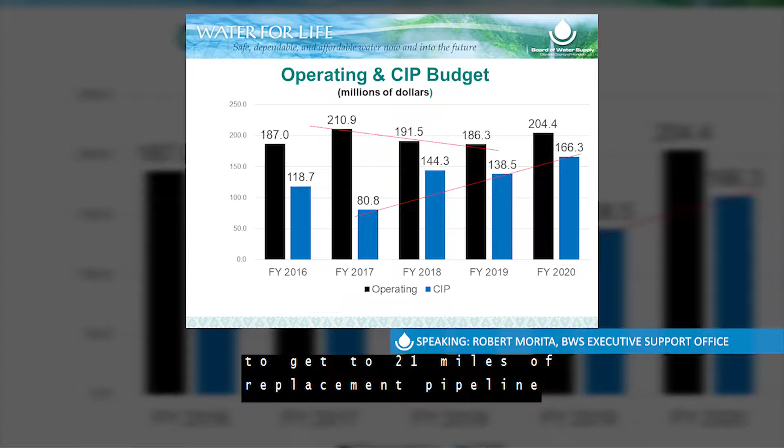The decreases, as mentioned, were shifted to the CIP budget in the past, and so this is the result — you can see the CIP budget has now had a marked increase in funding. This is consistent with our Water Master Plan, Long-Range Financial Plan, and our effort to get to 21 miles of replacement pipeline within 10 years.

For highlights of the operating budget, in terms of salaries, we are not asking for any increase in full-time equivalent counts — the count remains at 741 FTE. In terms of dollars, there's a slight increase of about $247,000 in salaries. That effectively reflects the effects of collective bargaining, the full-year effect of some of the latest collective bargaining increases reflected in fiscal year 2020 over FY19.

This was brought up at the budget workshop, asking about initiatives on the human resources and personnel side. As far as initiatives go, we've looked at optimizing available staffing — basically using whatever vacant positions we don't feel are the most critical, and in turn using them in place of more critical positions needed going forward. We're trying to live within our means, within the current employee headcount we've been given through the budget, rather than just coming forward asking for more and more positions each year. We try to look within first.

Expanding operational capacity through leveraging technology. In the FY20 budget, there's also development of an HR strategic plan being planned for, and participation in the Society for Human Resource Management, or SHRM, conferences to explore new strategies for recruitment and succession planning.

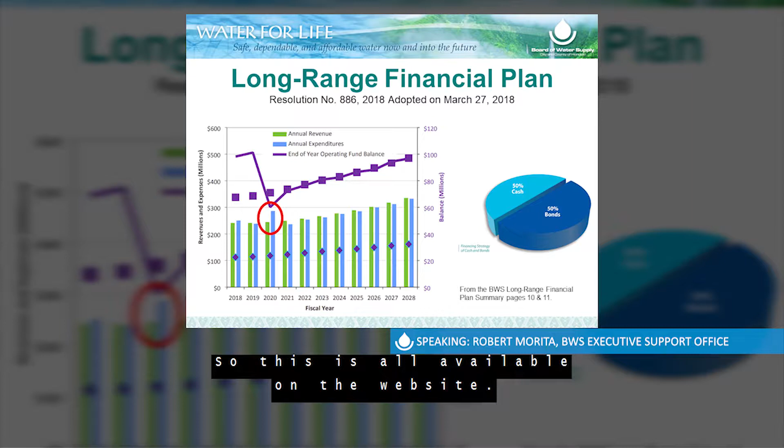So this is all available on the website. I took these two particular graphics from the long-range financial plan summary that's on the Board of Water Supply website.

And so now we're going to move into the capital improvement program budget, but I know I went through that kind of quick. I don't know if there's any questions from the board members that we can answer at this time.

Okay, if not, we will switch things up a little bit. Usually I call up Jason Takaki to go over the capital budget, but this time we wanted to ask Barry Usagawa to come up and cover some of the conditions and assumptions going forward for the Board of Water Supply in terms of its long-range planning and how that ties into the current capital improvement program budget we're presenting. As you know, Barry Usagawa is the head of our Water Resources Division. Barry?

Thank you, Robert. The FY2020 CIP does support the BWS vision and mission of Water for Life: safe, dependable, and affordable water now into the future. It is aligned with the strategic plan and the division's goals and objectives and the 6-year capital improvement program. So what does that mean?

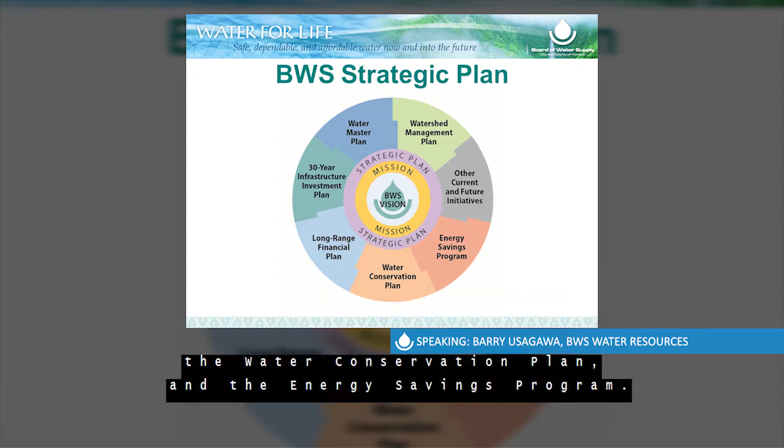Also tied in is the Long-Range Financial Plan, the Regional Watershed Management Plans, the Water Conservation Plan, and the Energy Savings Program. In the future, other initiatives will also drive the results you see in the annual CIP budget. The Water Master Plan evaluated the entire water system for condition assessment based on risk, and we define risk as the consequence of failure times the likelihood of failure.

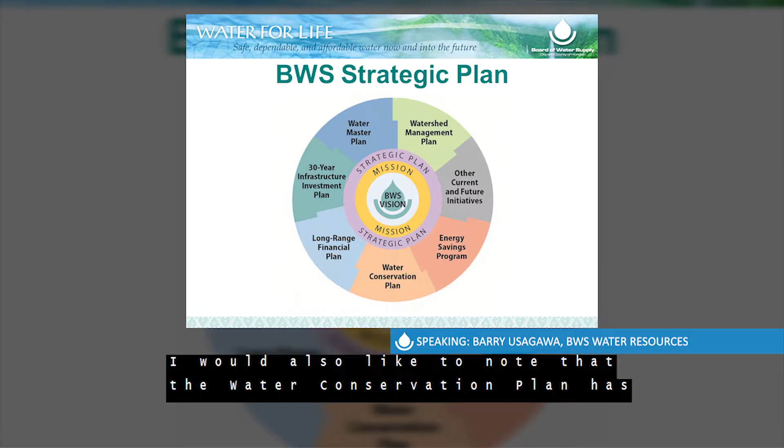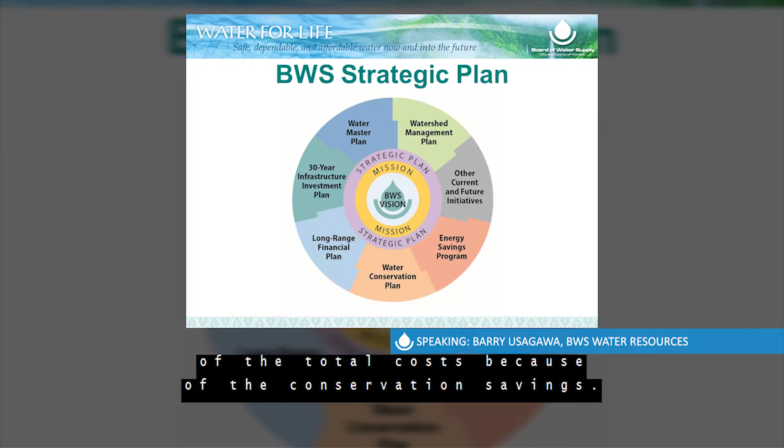The annual CIP reflects the highest priority projects identified in the Water Master Plan effort. I'd also like to note that the Water Conservation Plan has driven a 30-year reduction in water use, thereby freeing up existing water system capacity that addresses growth and resiliency. The capacity expansion projects you find in this year's CIP are only approximately 15% of total costs because of conservation savings. So what about climate change?

The Water Research Foundation - we partnered with the Water Research Foundation in 2015 to conduct a vulnerability assessment. The Water Research Foundation is one of the top research organizations for everything water in the nation. And so in 2015, we co-funded this vulnerability assessment study through their tailored collaboration program.

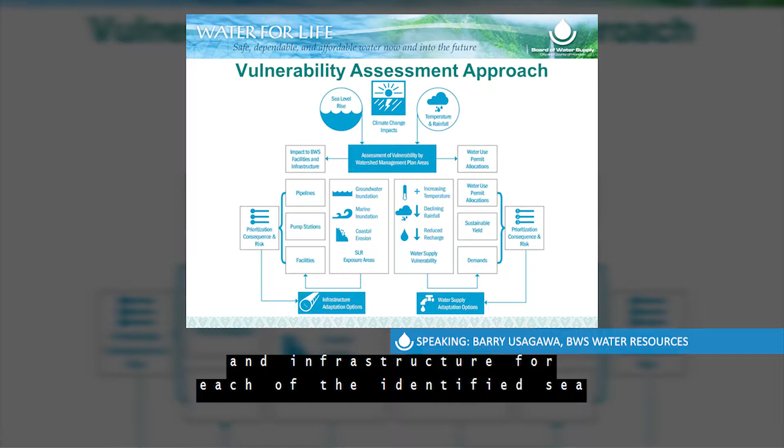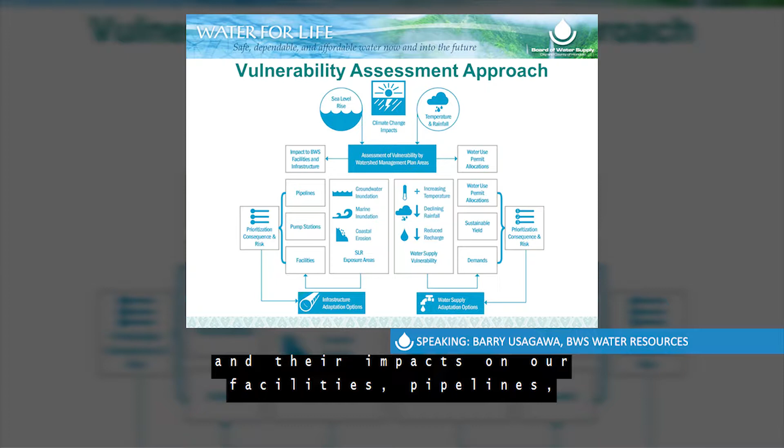The vulnerability assessment approach is based upon climate change projections and sea level rise, specifically potential impacts to BWS facilities and infrastructure for each of the identified sea level rise hazards, which is coastal erosion, marine inundation, and groundwater inundation, and their impact on our facilities, pipelines, pump stations, and other facilities from an affected sea level rise of 3 feet by 2100.

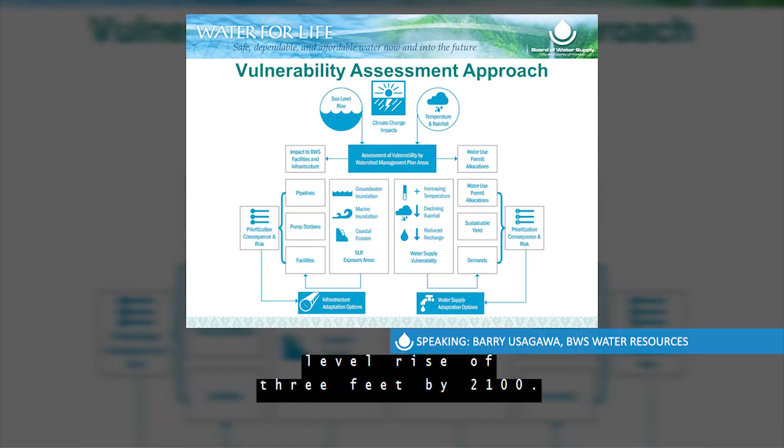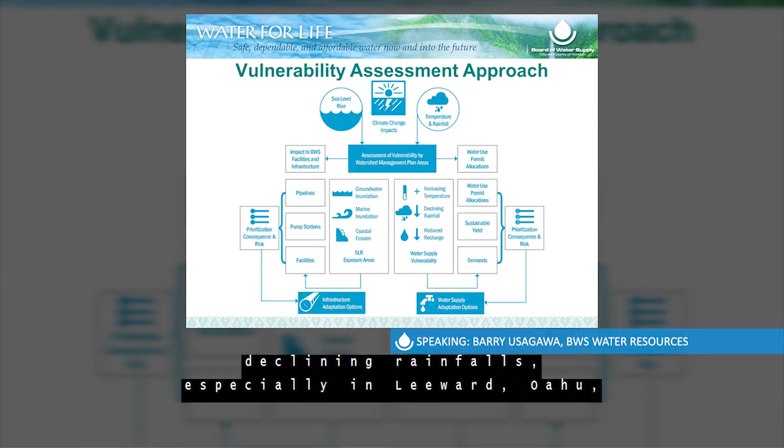For temperature and rainfall, we looked at impacts to the water resources and the effects on our water sources. We expect increased temperatures, declining rainfalls, especially in leeward Oahu, and the reduction in recharge that will impact the aquifer sustainable yields, water use permit allocations, and water demands.

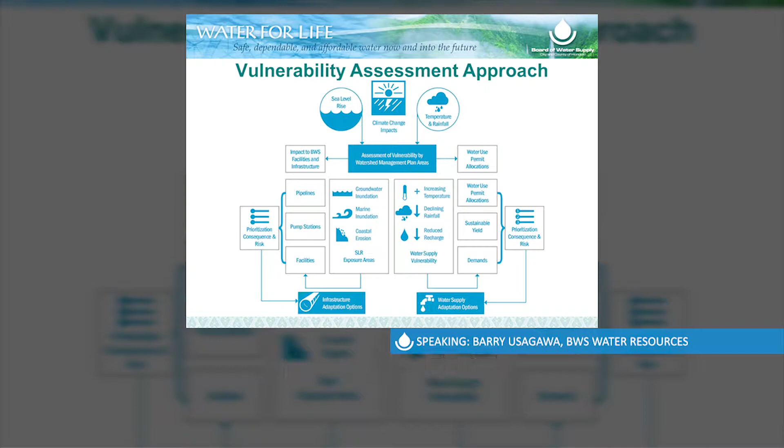In addition, the BWS has joined the Water Utility Climate Alliance Network, which is comprised of 12 of the nation's largest water providers that collectively supply drinking water to more than 50 million people in the United States. WUCA, as they call themselves, is dedicated to providing leadership and collaboration on climate adaptation issues to ensure that water utilities are well positioned to respond to climate change within the context of water management decision making.

So our intent is to, in effect, monitor the pulse of the nation's progress toward climate change adaptation and to fold that into our long-range planning.

With that, I will turn it over to Jason, who will walk you through the CIP. Thank you. Jason Takaki, head of our Capital Projects Division. Chair Andaya and board members.

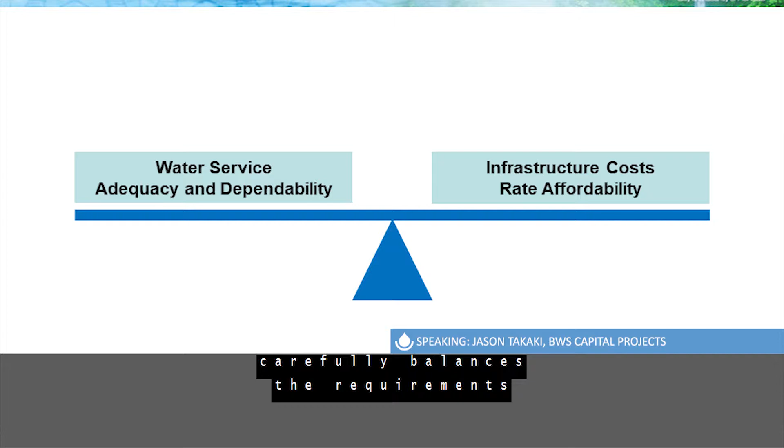This year's $166.3 million capital improvement program carefully balances the requirements of ensuring safe and dependable water delivery with cost-effective resource allocation.

Renewal and replacement addresses the needs of the existing water infrastructure. $115.9 million is proposed in this category. And finally, the 3rd category is capacity expansion, and $21.8 million is proposed for these projects.

$23.7 million will be provided from the Special Expendable Fund. And finally, $65.3 million will be provided from proceeds of a planned bond issuance that Mr. Morita referred to earlier.

We thought this would be a good time to tie some of the HR information that Mr. Morita provided earlier to the CIP. Throughout the development of the Water Master Plan, we have simultaneously been working to address the challenges of implementation. Following a detailed needs assessment, we optimized and documented work processes and implemented a number of initiatives to ensure operational efficiency.

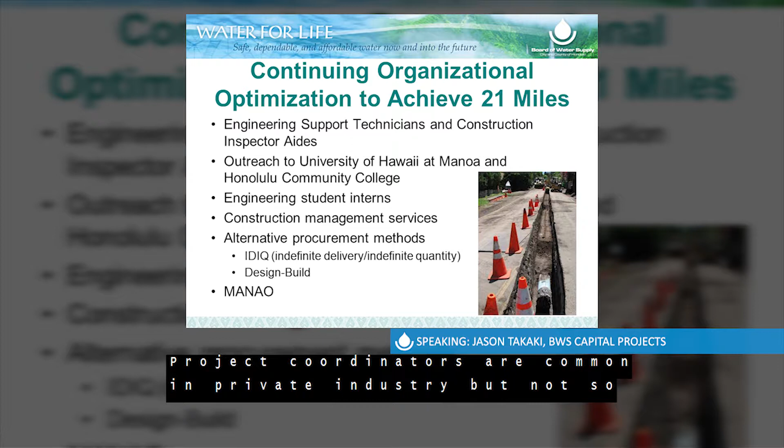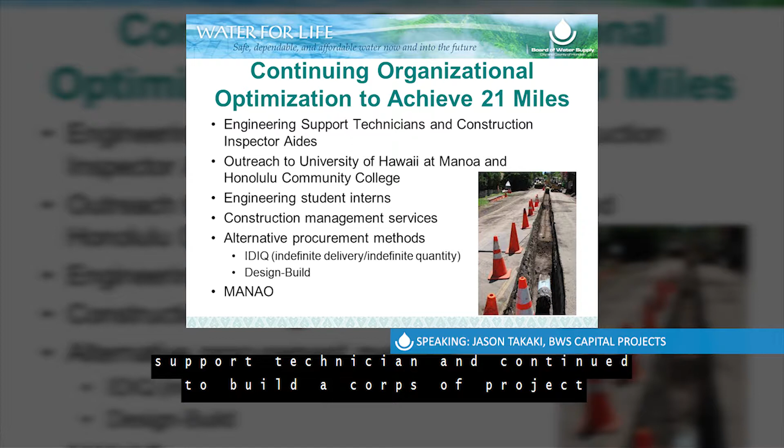Key personnel categories we need for the CIP, engineers and construction inspectors, are designated as shortage categories in civil service. To extend the capacity of our staff, we introduced project coordinators, paraprofessionals to improve the efficiencies of our engineering and construction inspection staff. Project coordinators are common in private industry, but not so in government. We modified the position description of an engineering support technician and continue to build a corps of project coordinators.

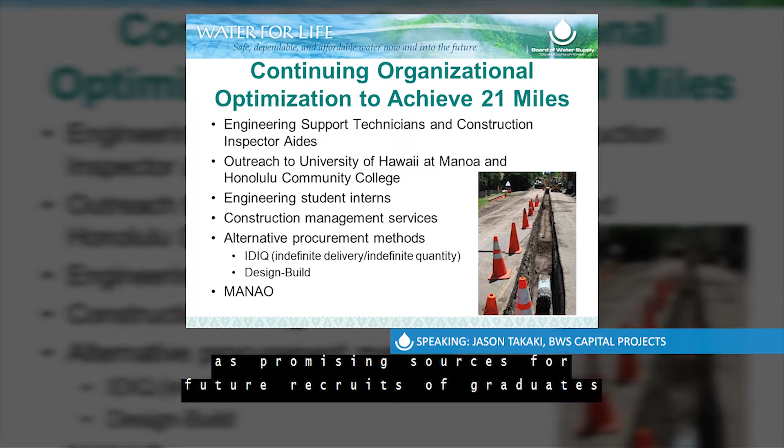We extended our reach for construction inspectors by lowering the entry level, and we've successfully recruited construction inspector aides. We established key contacts with the University of Hawaii and Honolulu Community College as promising sources for future recruits of graduates and student interns.

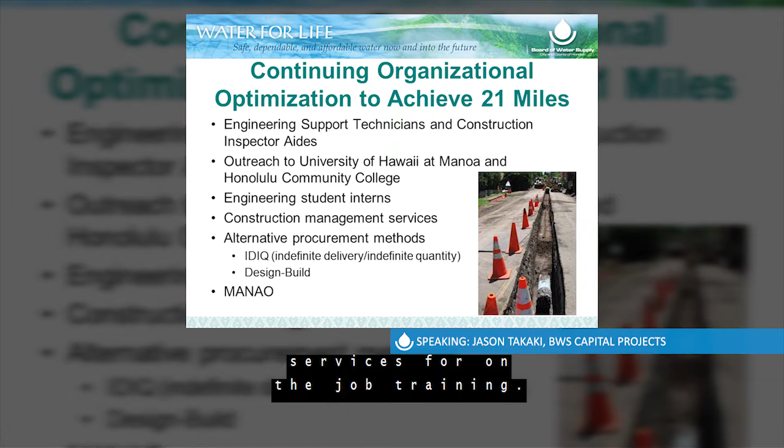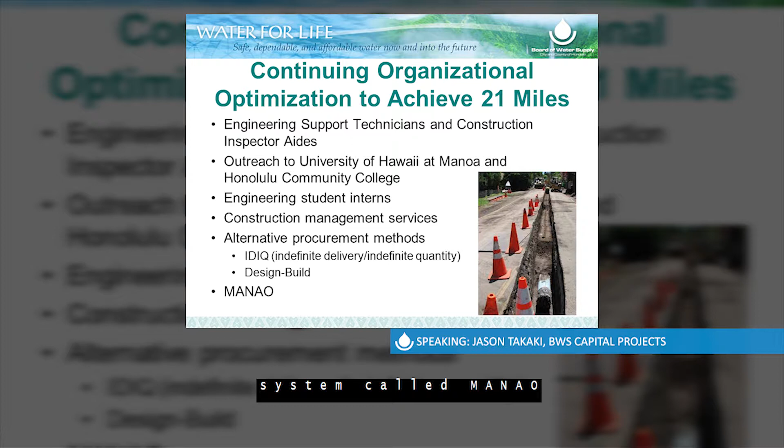We continue to increase staff capabilities using on-demand procurement and contract management training, and enlisting professional construction management services for on-the-job training. We continue to explore procurement alternatives and implemented a comprehensive project management information system called Manao. The Manao system will track project execution and improve predictability of project delivery.

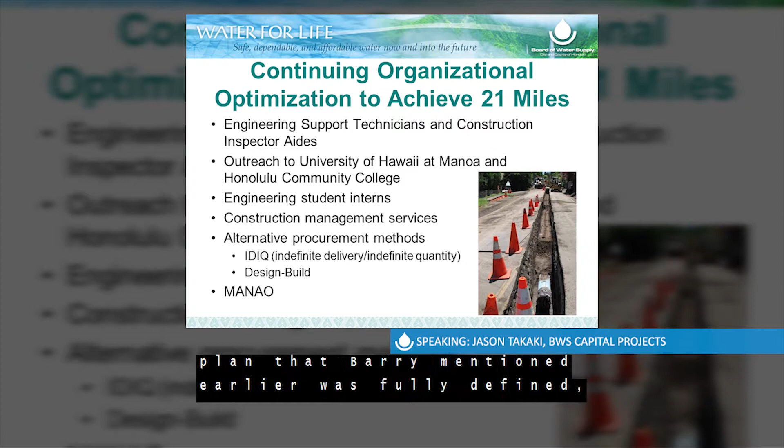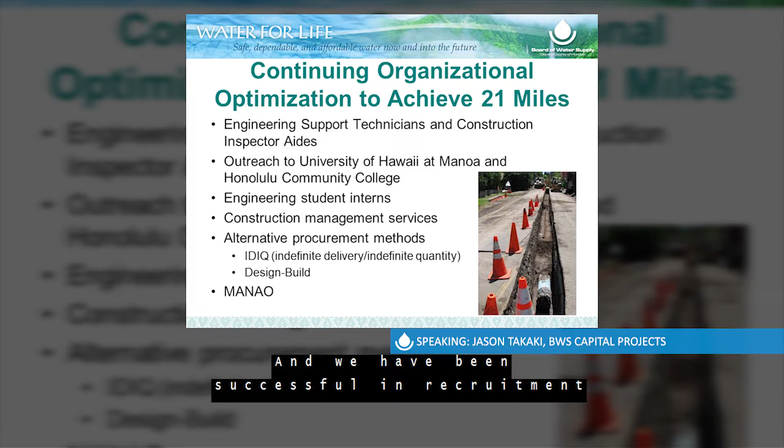Once the project mix in the infrastructure investment plan that Barry mentioned earlier was fully defined, a thoughtful, gradual schedule of staffing requirements could be formulated. We have been successful in recruitment and continue on target with our staffing schedule.

In Category 1, Research and Development, we will continue using construction management services for selected projects to increase our capabilities and capitalize on training opportunities to increase in-house construction management competencies. Additional groundwater monitoring wells are planned...

In Category 2, renewal and replacement, we address the needs of the existing infrastructure. We will replace pumping units at Mililani Wells 2 and Hoaeae Wells. We will renovate the Waipahu Wells 1 facility and continue with more pump renewal and replacement projects to address the needs of the system identified by our engineers and the Water System Operations Division.

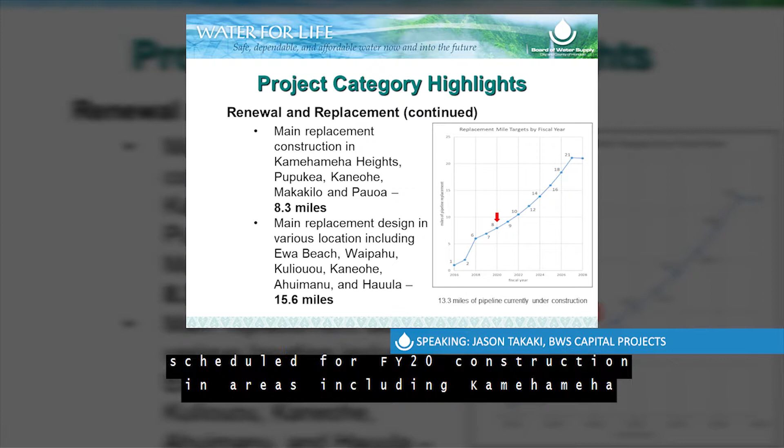Category 2, renewal and replacement, is also pipeline, and includes the needs of an aging water main infrastructure. Our largest asset is the underground transmission and distribution system, and just over $53 million are allocated for pipelines. 8.3 miles of main replacement are scheduled for FY20 construction in areas including Kamehameha Heights and Makakilo, in line with our target of 21 miles of main replacement per year by FY27.

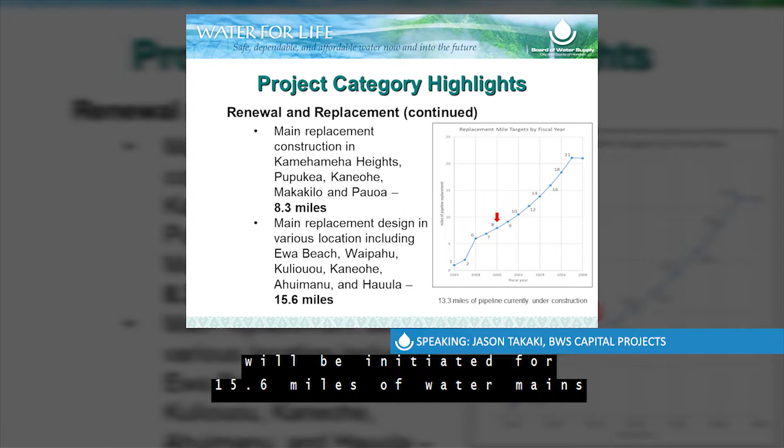In support of an expanding pipeline construction program, new pipeline replacement design projects will be initiated for 15.6 miles of water mains to address aging infrastructure in areas ranging from Ewa Beach to Kaneohe to Hauula. For your information, there are currently 13.3 miles of pipeline construction currently underway island-wide.

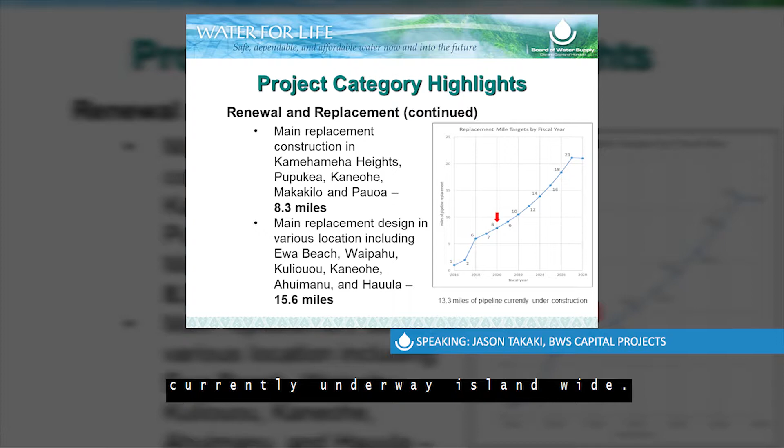We have learned that the plastic material previously used becomes brittle with age and cracks, resulting in service leaks. This year, 338 laterals will be replaced in the Waipio and Waikele areas. We will also continue with improvements to our granular activated carbon water treatment facilities to extend their service lives.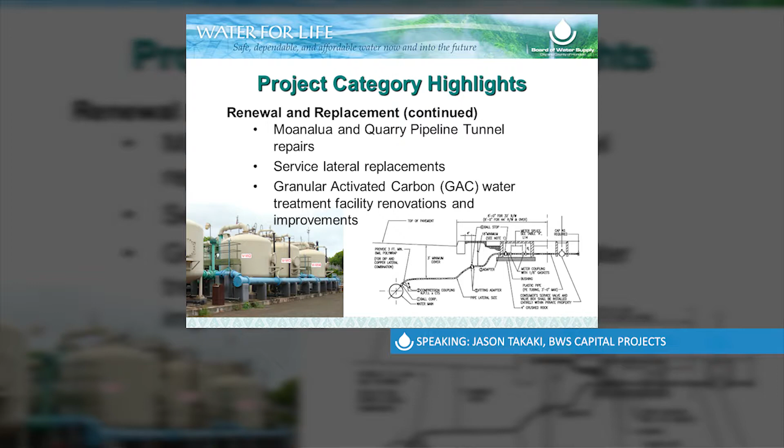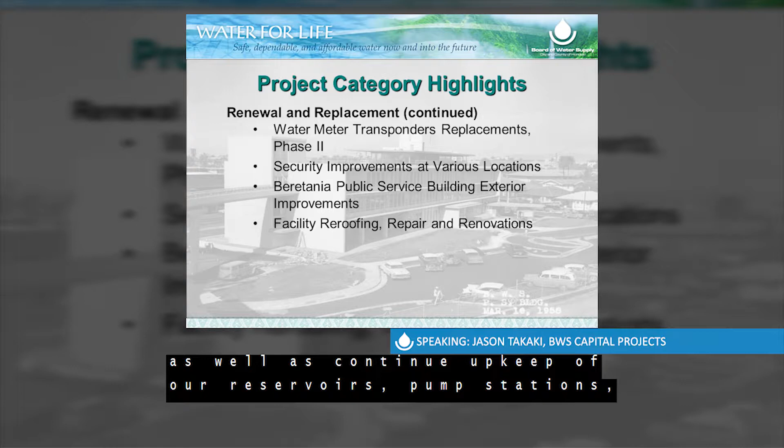Finally, in renewal and replacement, we will continue with phase 2 of our water meter transponder replacement efforts, continue our efforts to safeguard all BWS facilities. We'll make long-needed improvements to the Beretania complex, specifically the exterior of this public service building, as well as continue upkeep of our reservoirs, pump stations, and other facilities.

Finally, the capacity expansion category includes these projects. Metro 180 storage will be supplemented with a new 2 million gallon reservoir on the slopes of Papakolea. We will also increase source capacity in the Metro 180 system with a new Waialae West well station. And we will improve service reliability within the Mililani water system with a new Mililani 994 booster station.

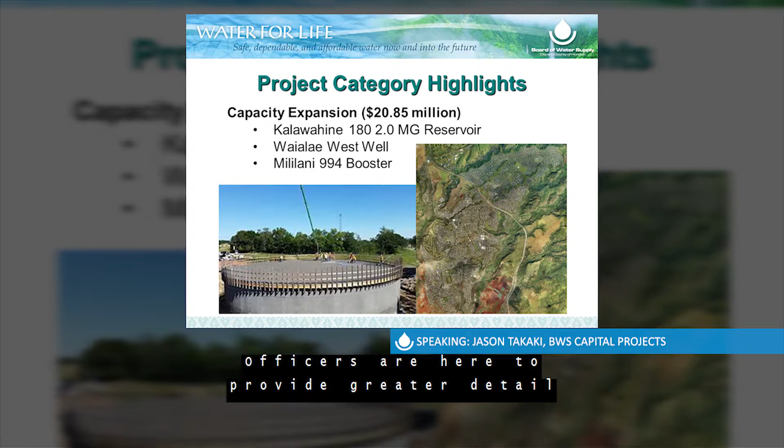So these are the highlights of the FY20 CIP. As I said at the beginning, our division heads and staff officers are here to provide greater detail on any specific projects. And so I'll open up to questions at this time.

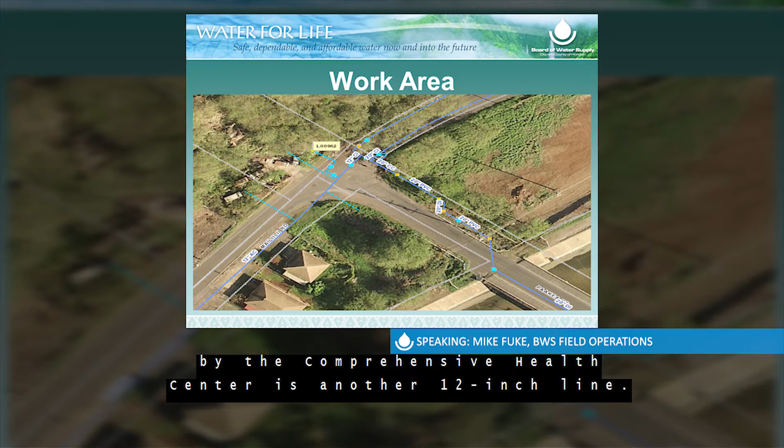Another factor, which relates to the PowerPoint, is the complexity of the repair. Last week, Thursday, we had a main break at the intersection of Mailili Road and Pa'akea, right in the middle of the intersection. At this intersection, we have a 20-inch main that comes down Pa'akea, turns right, goes up Mailili. Also going up Mailili is a 12-inch line, and also coming up Mailili from Farrington Highway by the Comprehensive Health Center is another 12-inch line.

They all converge at this intersection, and we had a main break there. That was Thursday morning, roughly 4:30 a.m. We got it done yesterday at 6:30 p.m. That doesn't mean we worked continuously through; there were times we had to stop and assess what we had to do. But still, it took us a long time to get it done because this was a very complex repair.

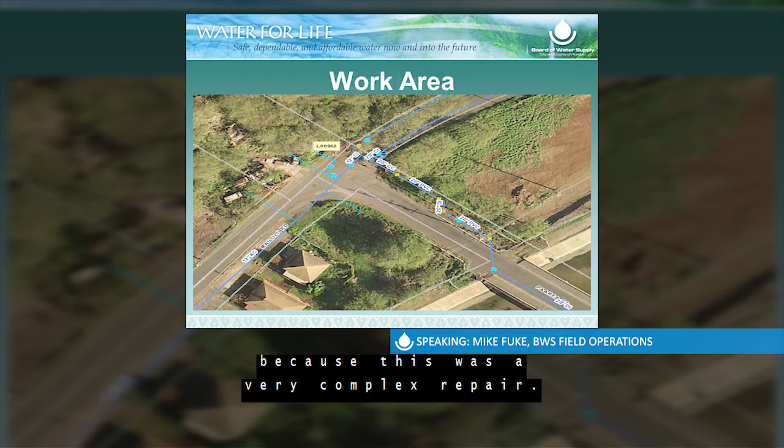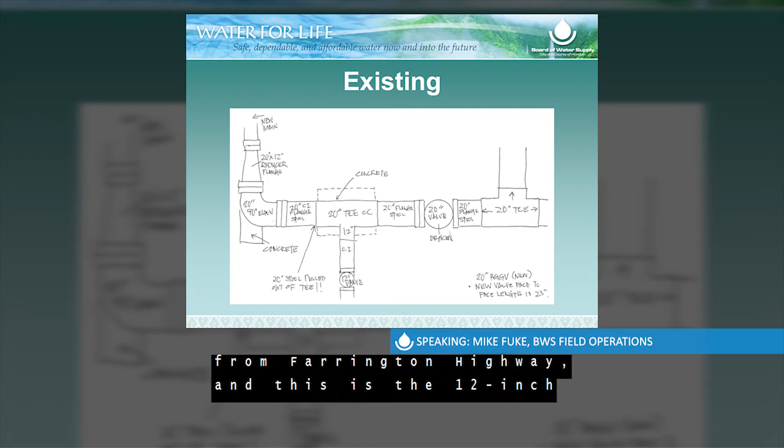This is a field sketch of what we found. First thing we had to do was find out what we had. This is the 20-inch that comes down along Pa'akea. This is the 20-inch that goes up Mailili. This line is the 12-inch that comes up from Farrington Highway, and this is the 12-inch that also goes up Mailili. At the intersection, all three lines converged.

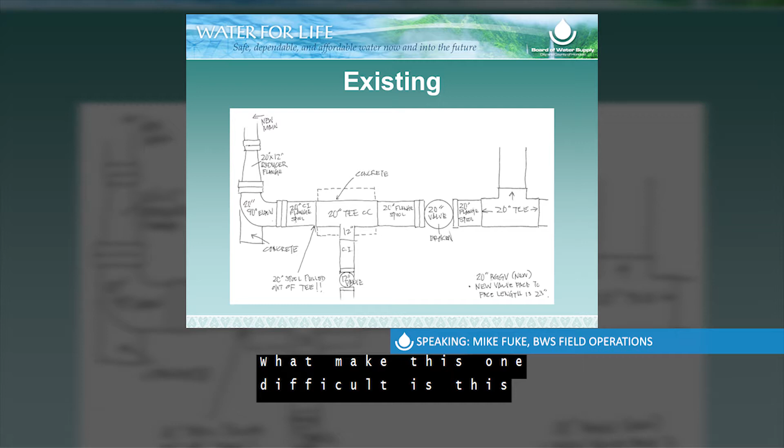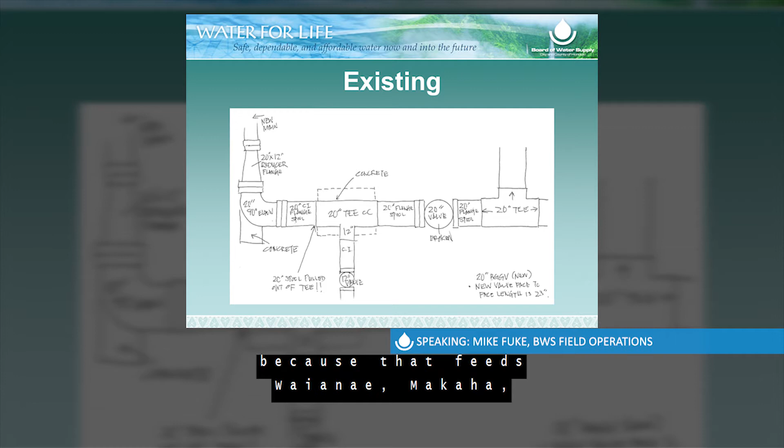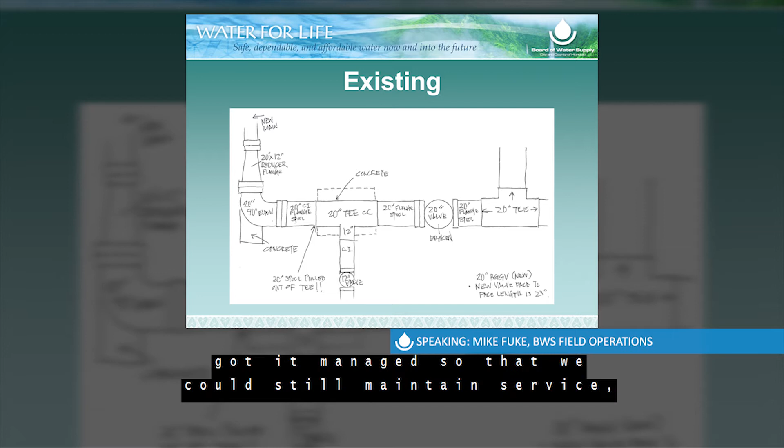What makes this one difficult is that this is a 20-inch concrete cylinder T, and this is the existing condition that we found. We also had a 20-inch valve here that was broken, so we could not close this valve and isolate the 20-inch. By the way, the 20 inch is really important because it feeds Waianae and Makaha, a great amount of water. I give credit to Kevin's group, the water system ops people, because they got it managed so that we could still maintain service, and they gave us more time to do the repair.

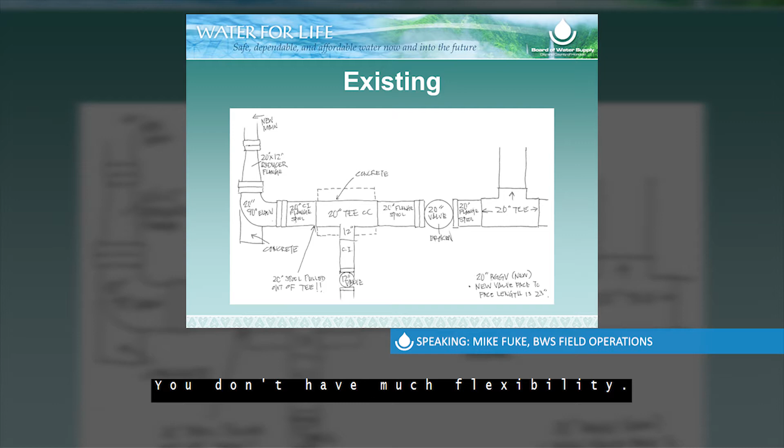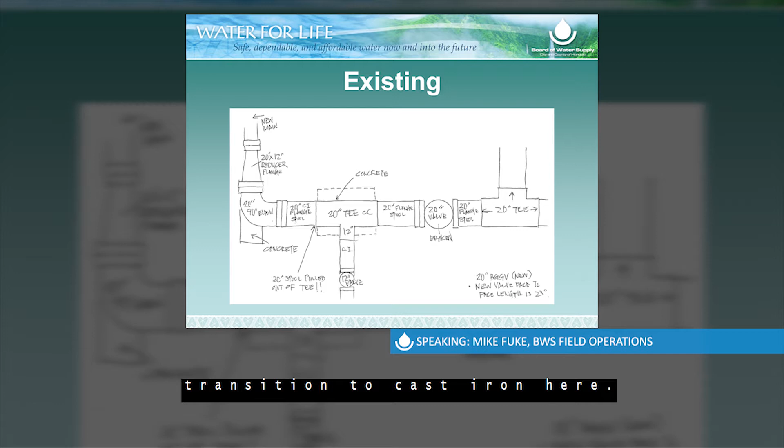This is also complicated because it's all flange piping in here. Usually we don't have flange piping, but we do. Flange piping is a very rigid pipe; you don't have much flexibility. Here we had a 20 by 12 T, concrete cylinder T, which brought this line. By the way, this line is an AC pipe and transitioned to cast iron here. The break occurred right at the face of this T.

We think the T sunk, which caused this joint to pull apart. But when we went in and excavated, we found this joint on the T to be in very bad shape. We were considering welding, but the welders told us it doesn't look very good, and they wouldn't recommend we do any weld on that.

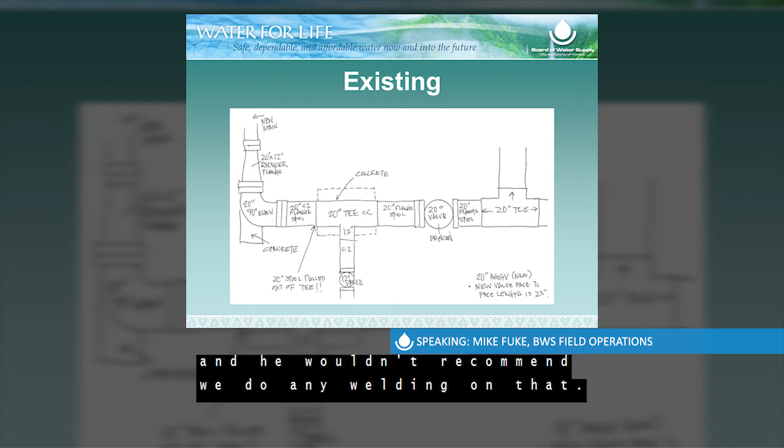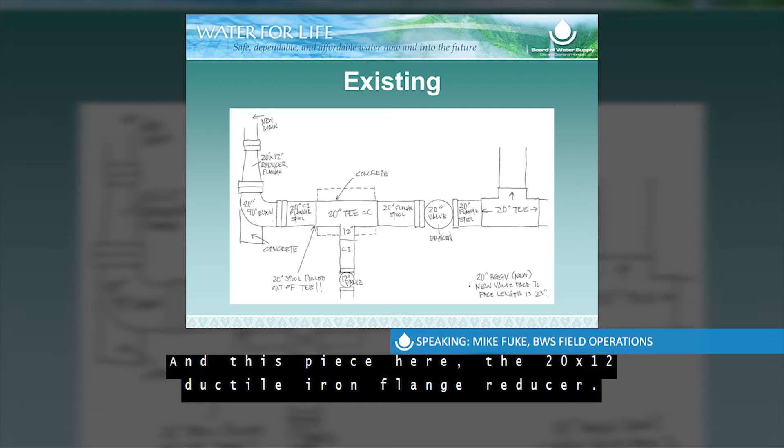Understand this is all 20-inch all the way around this way. Likewise, we had a 20-inch elbow, a 90-degree elbow here, and this piece here, the 20 by 12 reducer, is a cast iron, 20 by 12 ductile iron flange reducer.

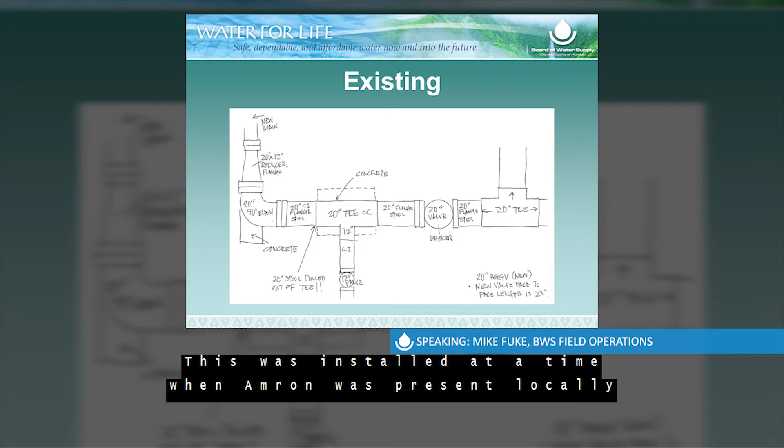This was the key piece for us to do this repair, because we don't have concrete cylinder pieces with us in our yard. We don't have it. This was installed at the time when Amron was present locally and they were manufacturing concrete cylinder pipe. But unfortunately, Amron is no longer in our market here in Hawaii.

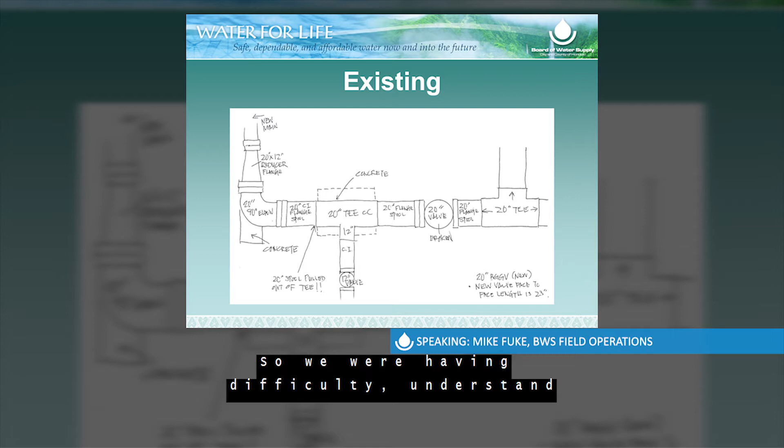So we were having difficulty. Understand too, we also had this 20-inch valve that was broken.

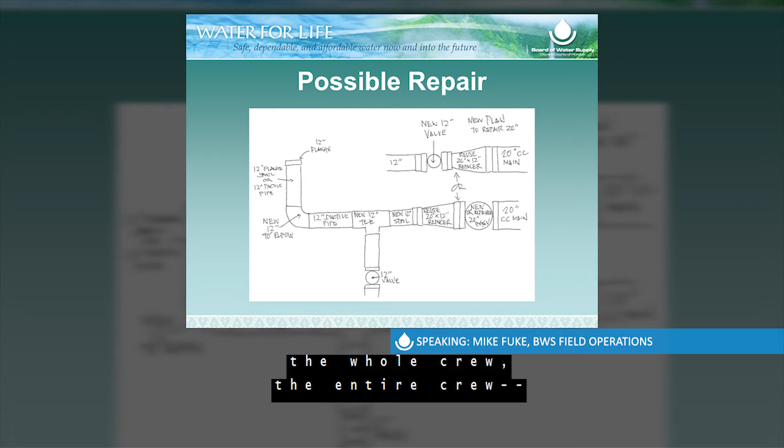This is a detail of how we repaired it. Actually, we used this part here up until here. This was because the field crew who was working out there, the entire crew, Wayne Tello, Rob Otterdyke, Andy Berengue, Danny Lee, we all got together to figure out what we see and how we can repair this.

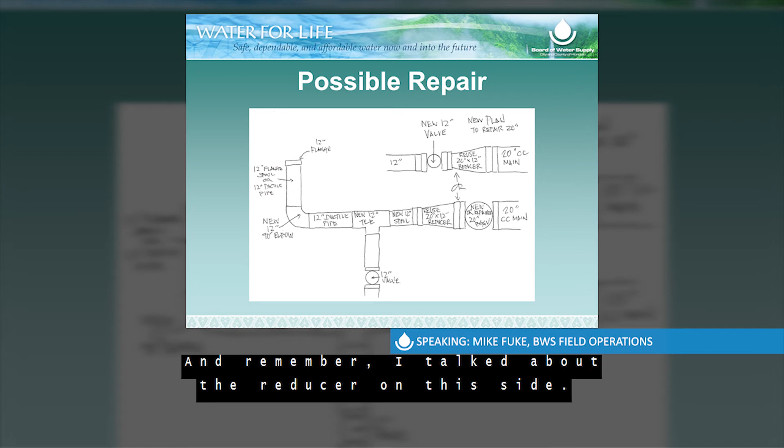It was a joint effort. We really put our heads together trying to figure out what we could do. And remember I talked about the reducer on this side? So we moved that reducer to here, which enabled us to bring it down from a 20-inch to a 12-inch.

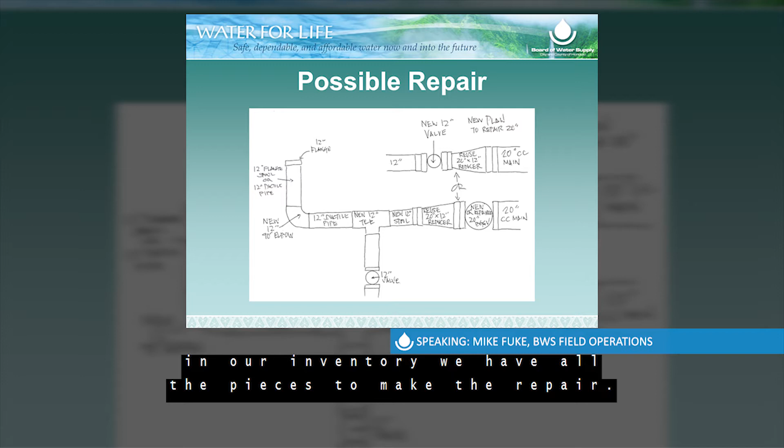And once we get to the 12-inch, then in our yard, in our inventory, we have all the pieces to make the repair. Okay, now our materials, the only thing I had to worry about was this spool right here.

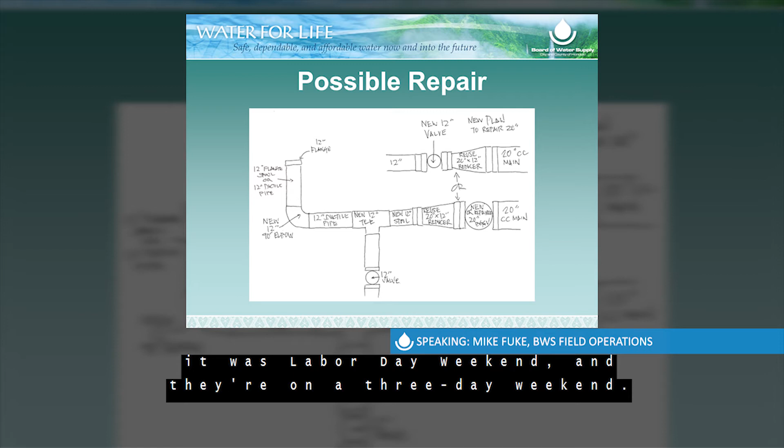We did not have this flange by plain end spool, and we called our vendors. Unfortunately for us, two major vendors were closed for Labor Day weekend, a 3-day weekend, so they weren't working on Saturday. But we lucked out because one person happened to be in the yard when we called, and he said okay, I got it, and got it for us.

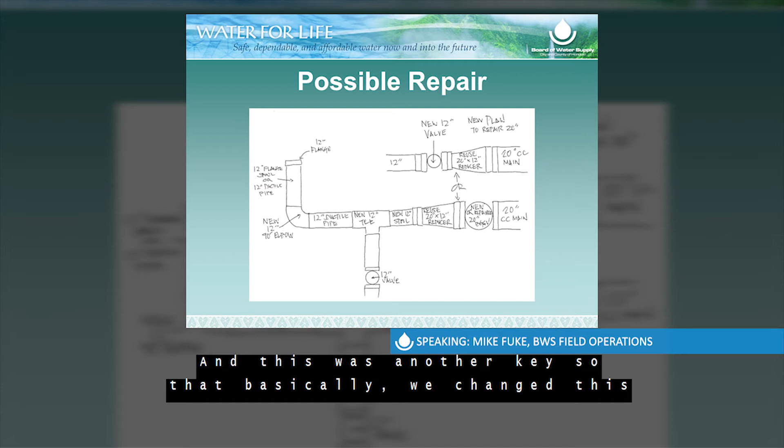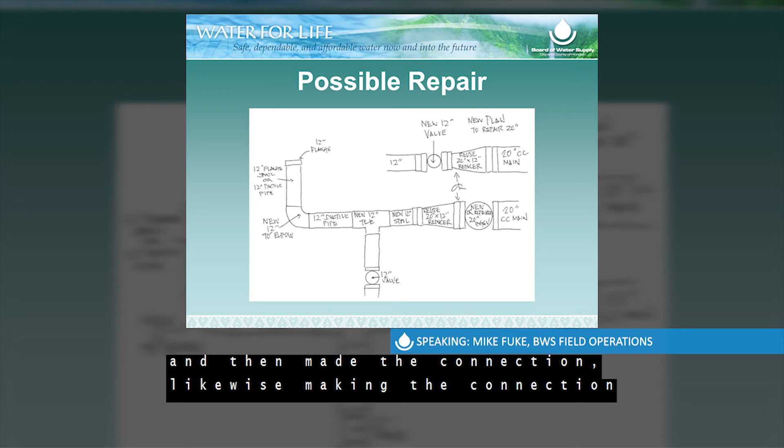This is another key so that we could basically change this to a 12-inch valve, with a 12-inch line from the valve all the way around, and we made the connection. Likewise, making the connection down here to this AC pipe.

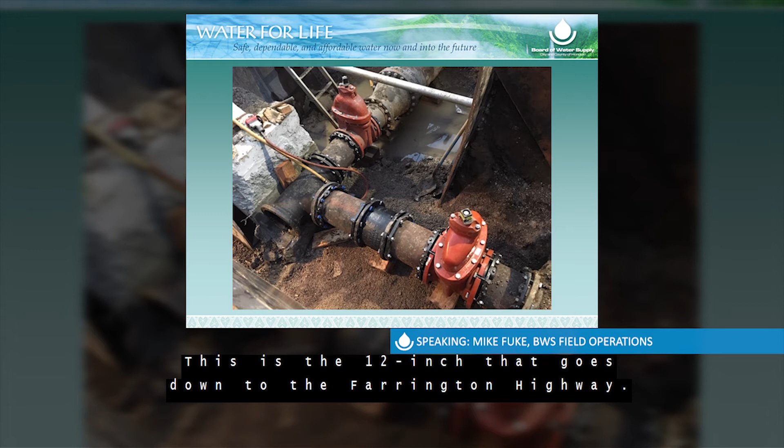This is the 12-inch that goes down to Farrington Highway. This is the 20-inch, where'd it go? This is the 20-inch that comes from along Parkea. This picture does not show the other 12-inch; it was taken before that was installed.

This is the 12-inch valve that we installed. This is the reducer that we relocated from the other side. So we used a 12 by 12 T connected up. We used Megalugs to make everything rigid because we did not want to wait for the concrete to set for this reaction block. So this is what it is.

So sometimes it doesn't seem like a lot, but the complexity of this was pretty big. We were there Thursday, basically the whole weekend. Gives the crews credit, they worked through Sunday, Monday, Labor Day. They gave up their time to get this repair done. Roughly about 100 hours to get this thing done.

Any questions on anything? Members, any questions?

If not, thank you very much, Mr. Fuke, and please thank the entire crew. We really appreciate everything that your crew does to get these repairs done. I'll pass the message along. Thank you. And thank you, Mike, for the shoring and the ladder.